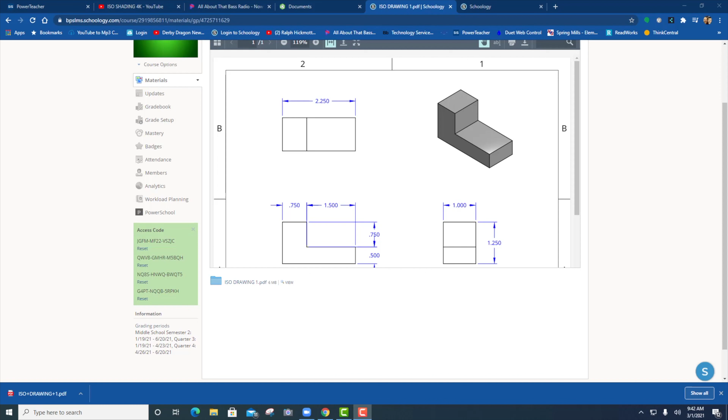All right, so we're ready to draw our first isometric drawing in our 3D CAD software, Onshape. So what I'm going to do is, if I click on this little magnifying glass here at the bottom, it'll open up into its own full screen version, and I can zoom out a little. And so here are the dimensions in inches, which is what I want.

So it's 1.25 tall and 2.25 wide. The top is 0.75. This is 1.5. Here I've got 0.5 and this is 0.75. Okay, so what we're going to do is we're going to go into Onshape and I'm going to create a new document. I'm going to call this ISO 1.

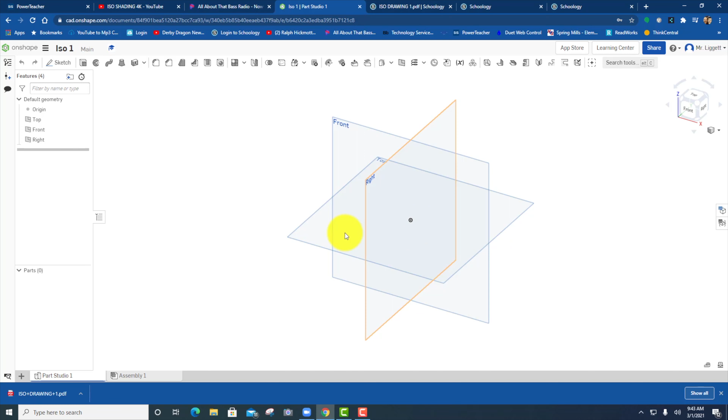Now, like any drawing that we do, the first step should be to come up to the three lines here, go to workspace units, and change this to inches, and then hit the check mark. So we have three work planes on our screen. What we're going to do is click on sketch, and I'm going to draw this front view right here, and then I'm going to extrude it back.

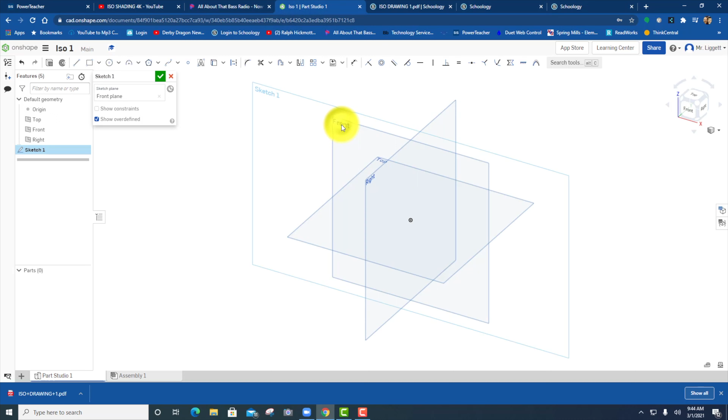So I want to choose the front view work plane, and then I'm going to click on the front of the view cube, look straight at it, and now I'm going to draw this shape using the line. Now, if you recall, it's 2.25 wide, and then I'm going to go up 0.5, over 1.5, up 0.75, over 0.75, and then return back to the beginning. So,

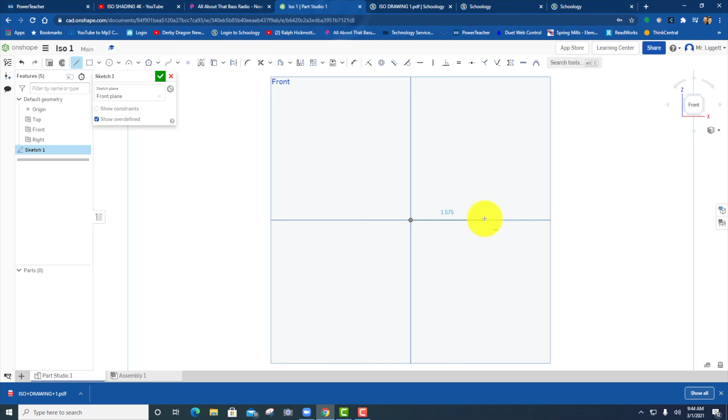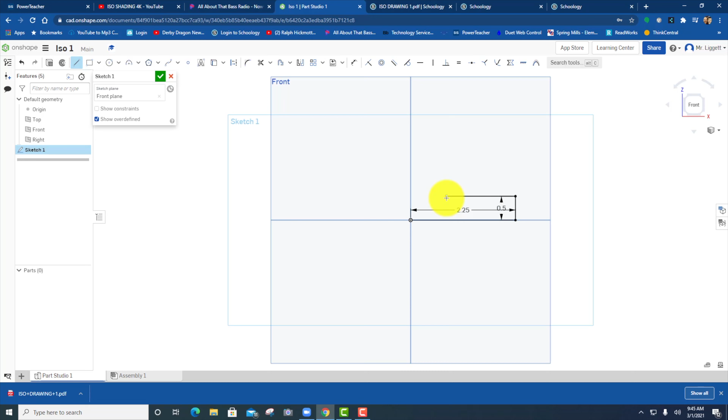this direction, I'm going to just draw a line, and then I'm going to type in 2.25, enter. Then from here, I'm going to draw up 0.5 this way. This is 1.5, vertical, and then I'm going to type in 0.75, and then back here 0.75, I had it correct, and then back to the origin.

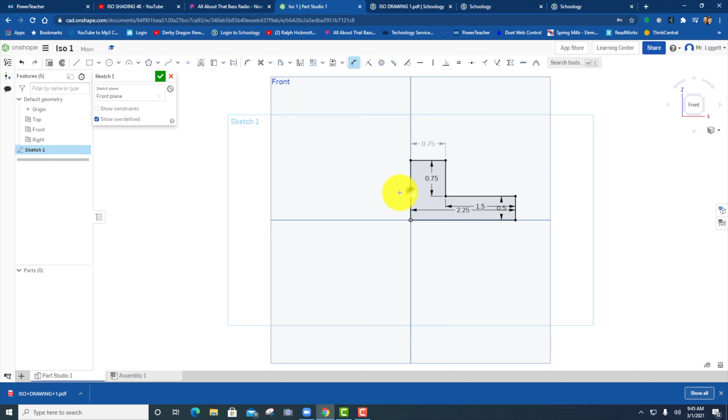Okay, so everything looks good here. I can double check my measurements: 2.25, 0.5, 1.5, 0.75. If I add a dimension up here, it should be 0.75. And if I add a dimension here, it should be 1.25. And if I go back, 1.25, it looks like everything looks correct.

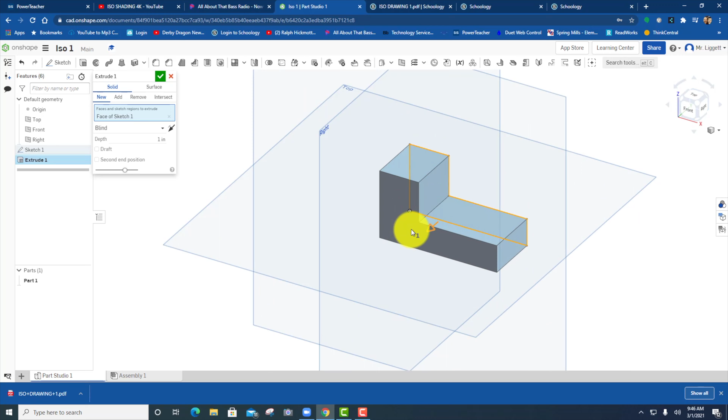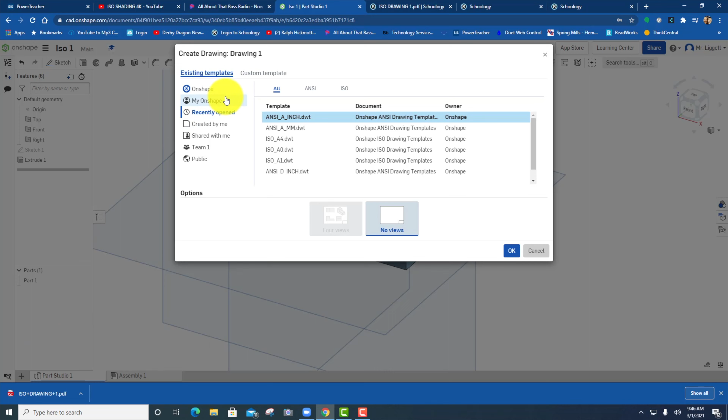So I'm going to hit the check mark, and I'm going to extrude this shape, and we're going to look at this in a 3D view. According to this, it's 1 inch wide, so I'm going to go ahead and extrude this 1 inch, hit check mark, and so that's finished. So now I want to go to the plus sign, create drawing. I'm going to go to custom template and click on do not include title block, and then hit OK.

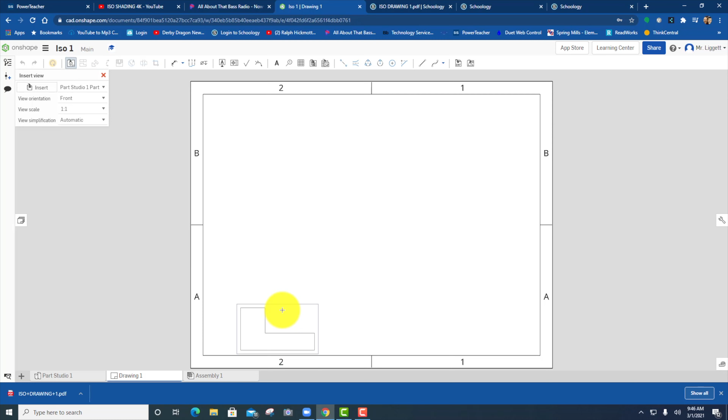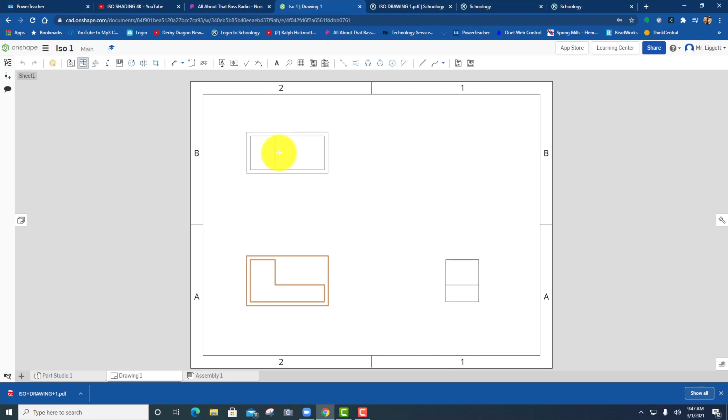All right, first thing I'm going to do is click on our part 1. I'm going to place it in the A2 quadrant, right about here. And then it's ready to do a second drawing, so I'm going to put that in A1. Now, to get the top view, I have to click on the front view, and then it's ready to draw that. I'm going to put it up here near B2. And then I also want an isometric drawing, so I'm going to click here, and click into B1.

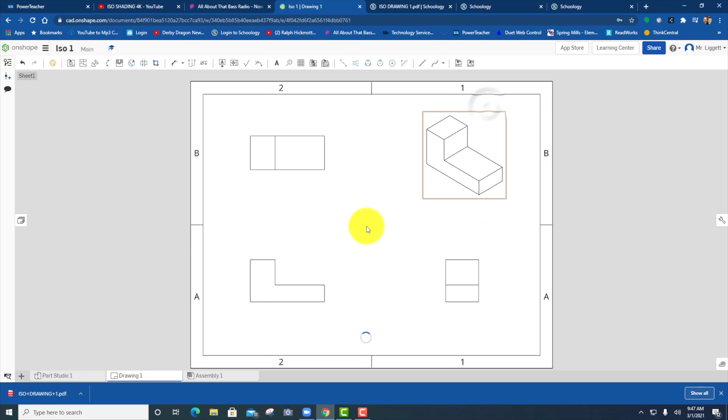Now, I have all my views that I want, but what I also want to do is, I'm going to hit escape and right click on this, and I want to show hidden lines in these three views. And in this last view, I want to show shaded view. Okay, and so that looks good.

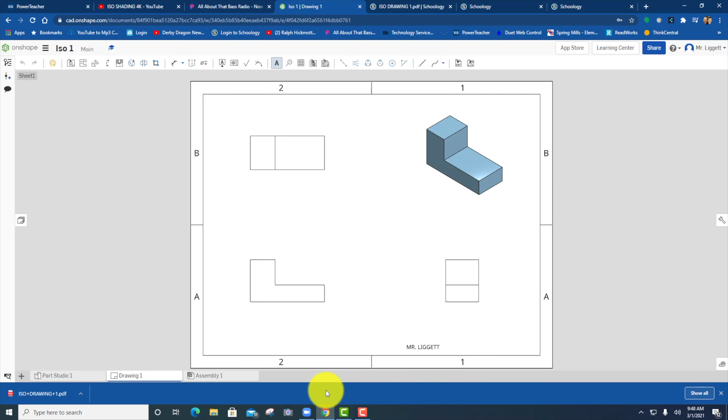The last thing I want to do is use a text, a note, and down here at the bottom, I'm going to type in my name. All caps. And so we can stretch that out and hit check mark. All right, so that looks good. Okay, so drawing number 1 is